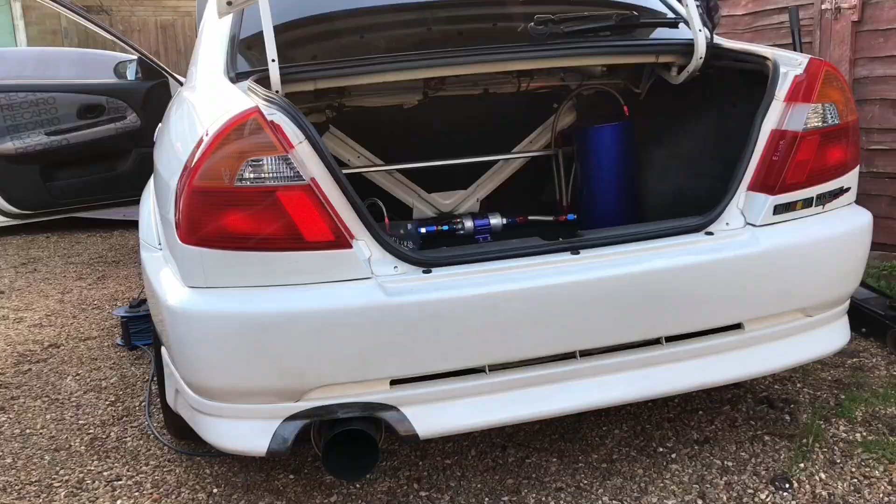So welcome back to another episode on the Mitsubishi Evo project. So you've seen that the engine was stripped down a few episodes ago and we were waiting for parts to come in. So obviously we've got the crankshaft in the box down here, which I'll pull out and show you for people who haven't seen it in the past.

And also we were waiting for rods to come from America, another set of I-beams that we wanted to fit into the car while it was apart, because I wasn't happy with the I-beams that came out of the car. They had a bit of damage to the bearing surfaces and I just was not happy with it. So ARP studs are in there still.

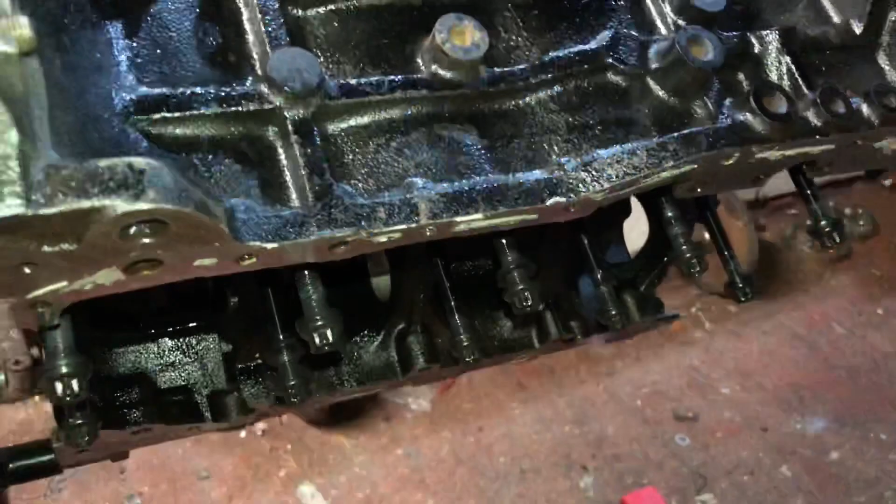We're going to get to installing this crankshaft now. I'm going to show you why the rods ain't getting fitted to this engine, and we're going to be replacing them completely. Obviously we've got CP pistons and I-beam rods to go in this, and head studs, etc. So we're just going to basically get to building this up. You saw it built up in the episodes last year, so there's no need to go through everything again.

So basically this is just going to be me building the engine and getting the short block finished, and then we've got the head, just going to clean up the head, and then we're about to bolt that on. So I hope you enjoy it.

So first off, all I'm going to do is get to cleaning up the block surface and any of the old gasket that's on it, just to make sure that the engine's sanitary clean. So it's got to be spotlessly clean, nothing inside, no grit, nothing. So blow out all the airlines, going to get brake cleaner in there, and I'm going to do all this first before starting to measure out the bearing clearances, etc. So that's what I'm going to get onto now.

I'm going to leave the studs in because they've all been taken out and I've ARP lubed them back up. So just going to get to thread tapping these holes, get rid of all this nasty sealant, and then we can get to building it back up.

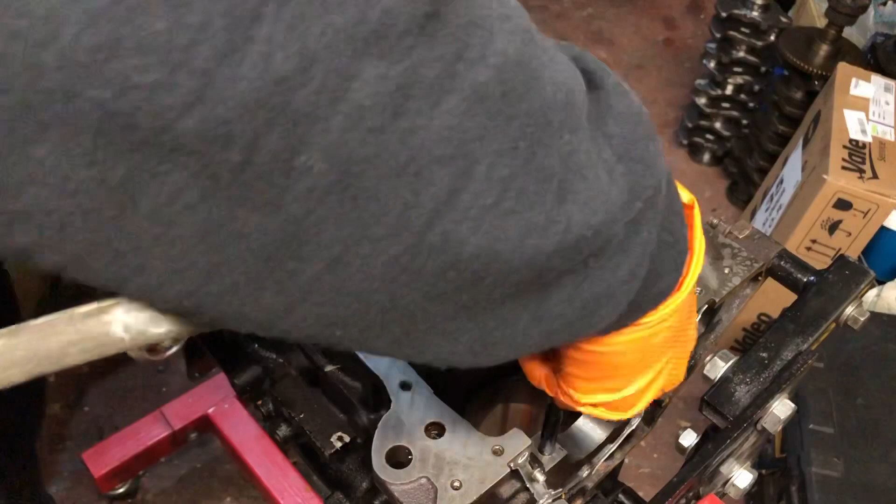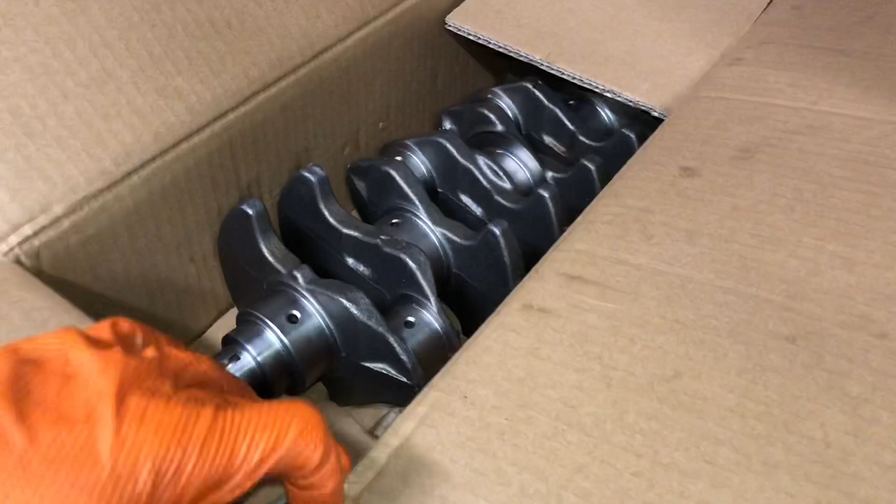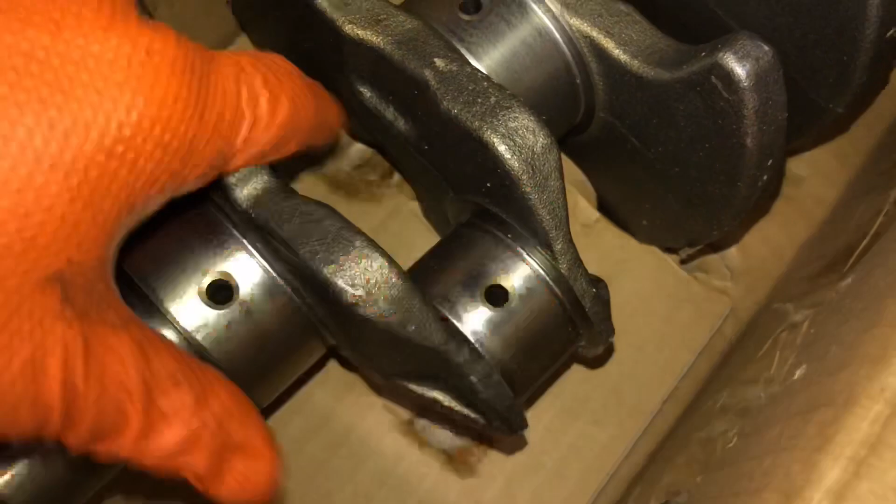So you've seen them before in the last video, but the parts that we've got for the car, this is the brand new 4G64 crank for the stroker kit. Obviously this is the part number for it for Mitsubishi, brand spanking new. So we're going to clean up the journals because they come with like a wax coating over the top of them, you can see here. So we've got to get some brake cleaner and get rid of that nasty stuff off of there so we can actually measure the bearing specs and tolerances.

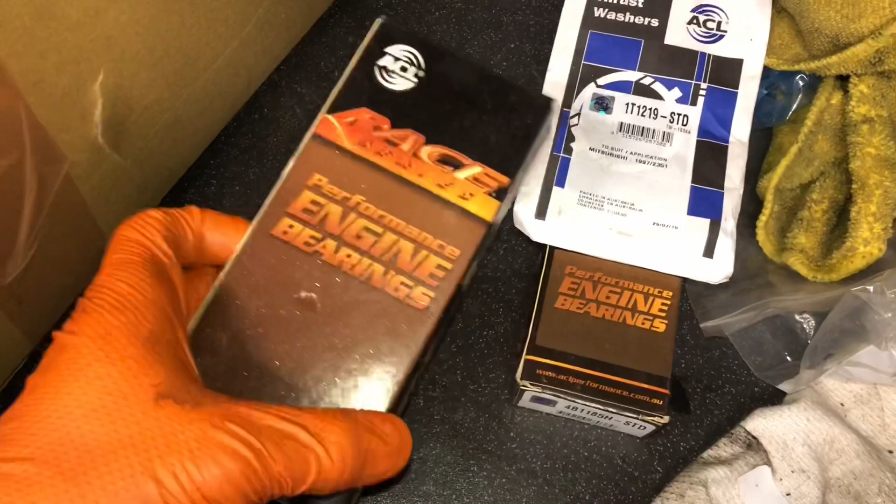Bearings we're going for ACL, obviously tried and trusted. I've used these a lot. King, Mahle, ACL, great bearings. So these are the mains. They're in standard size, and these are the rods, and obviously these are the thrust washers. So we're going to get to measuring out these bearing oil clearances.

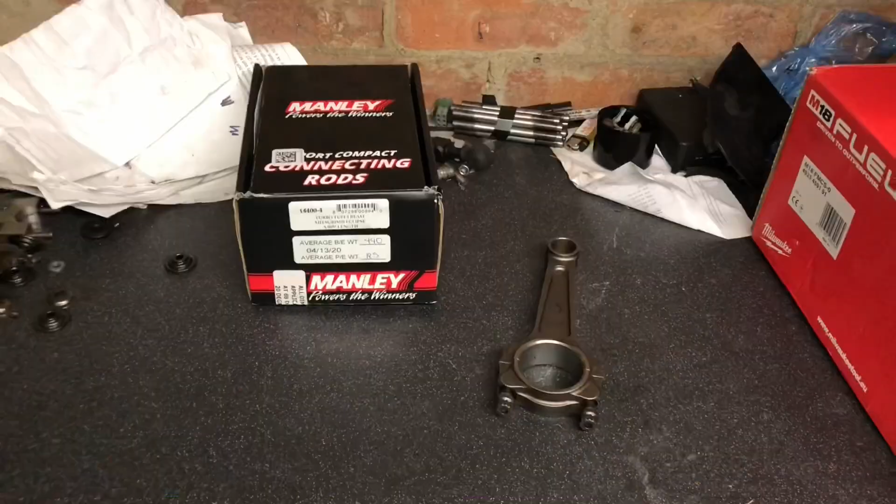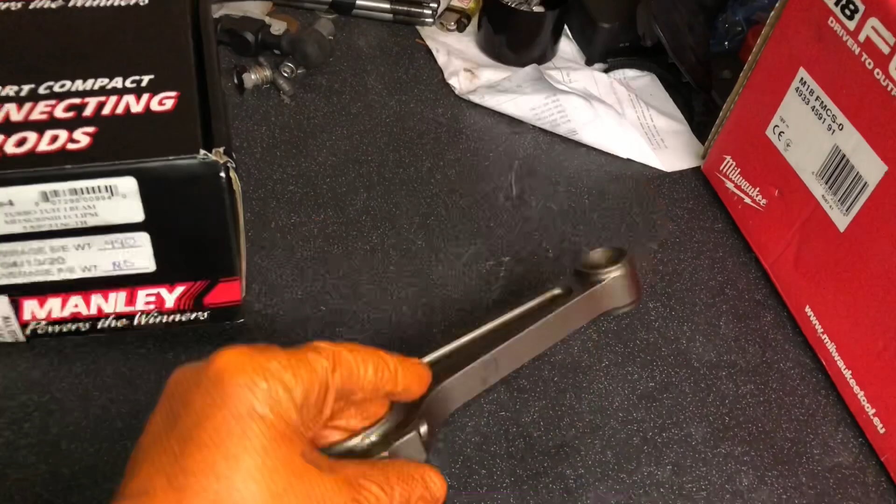Right, so now onto the connecting rods that we're going to be using with the car. Now obviously we had I-beams in there already. These are Turbo Tuff I-beams. Obviously they're a few years old now, and you can clearly see in here over time the bearings have spun in this engine, and they've been reused, and obviously the bolts have been reused. It was just a no-brainer to go with a new set of rods.

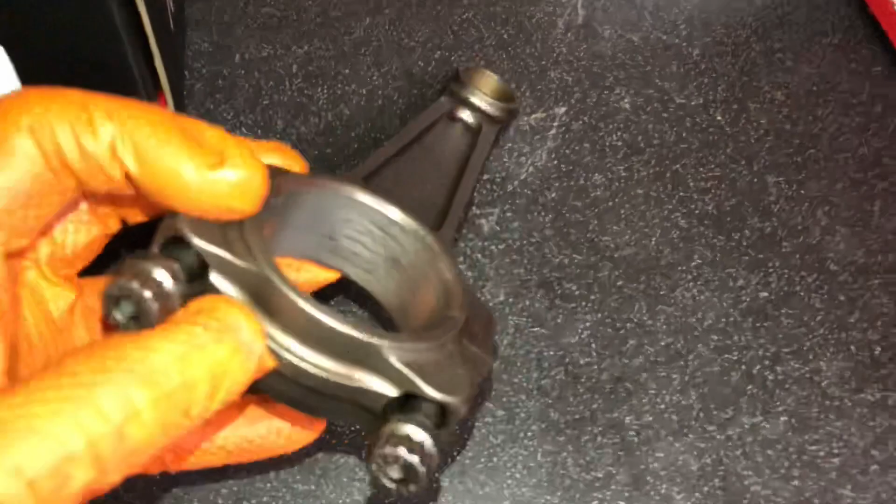Now you can see inside there clearly, try and focus in quickly, that there was a bit of damage that I wasn't happy with from the last bearing that spun, obviously down to the low oil pressure issue. The actual crank, which I'll show you in a second, was destroyed on the big end bearings, not so much on the mains, just on the big ends, and you can see in there it's damaged.

So what we've done is bit the bullet and went out and got another set of rods. So these are I-beam rods, exactly the same, but these are an updated version. So these are a lighter rod. So these are the same length, 5.905, and they're exactly the same for the stroker kit that we need. And we've also gone out and got matching bearings for them.

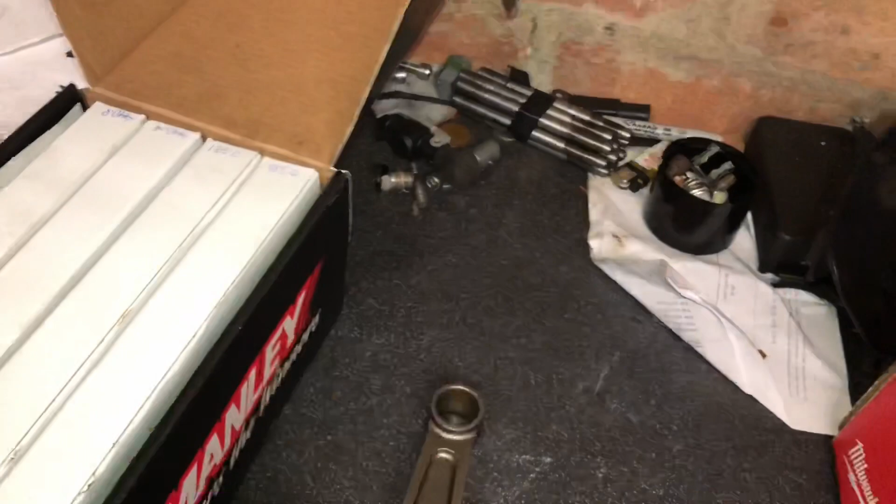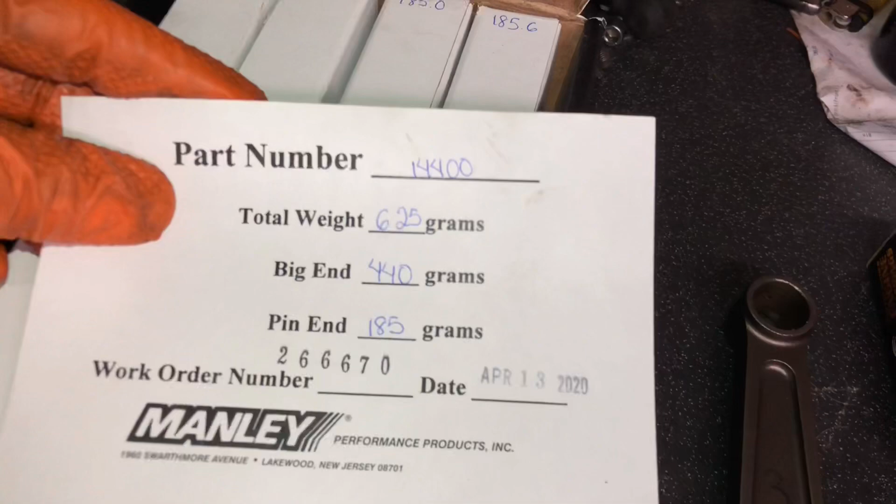So you can see here the recommended bearings for the ACL 4B1185H, and they're exactly the bearings that we got for the rod bearings as well. So you can see 4B1185H. So matching bearings, ACL race bearings for the matching rods. You can see all the rods have been weighed on each end, big end and the little end, and the weights are on there as well, 440 grams, total weight 625 grams. So everything's spec'd out exactly how we want them.

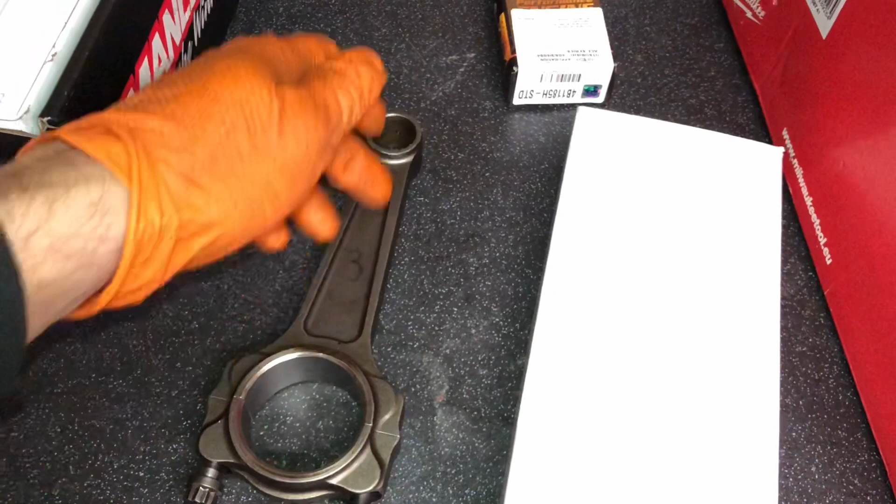So just going to unbox these now so you can see them side by side, because they're a slightly different rod compared to the older rod. This is the older style, and you'll see that there's some weight being saved on the big end, and it's a slightly different design up this end as well. The whole rod's been basically redesigned, and you can see in there obviously the bronze bushing that's been put in the little end. Just over time this starts to wear.

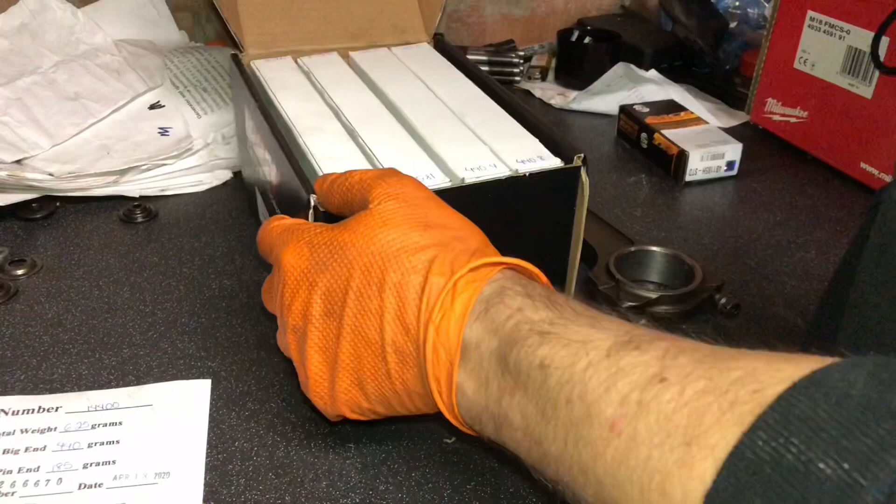There was no knocks from the little end or anything. These rods are actually good. But obviously down to the wear that's happened over the bearings spinning, it's a no-brainer just to replace them. So bit the bullet, these are the rods, let's unpackage them. Right, so let's get to unboxing these rods. So obviously you've just seen what rods we've gone for, and I'm just going to show you a comparison of them side by side now.

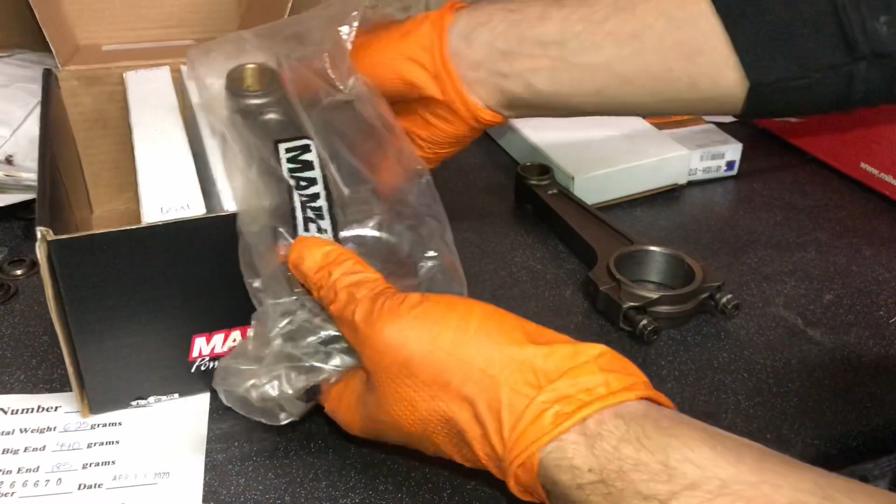So obviously we've got 4 brand new rods, that everything's been weighed out, so I can spec them with the pistons absolutely perfectly when I weigh the pistons. So you can see straight away they're a slightly different design to the ones out the old engine. So you can see there, the left-hand rods, they look a bit beefier actually. They do look a little bit beefier. But you can see here, on the side here, it looks like some material's been taken off. Obviously that's allowed for a little bit of weight.

I'm not really sure how many grams they are lighter, but they actually feel lighter. They definitely feel a lot lighter, which I'll weigh them obviously beforehand. Because I know these are 625 grams, but I'm not sure how much these ones weigh because they're an old design. And obviously now we're going to have fresh ARP bolts, because the bolts that have been in these rods, they've been torqued up a few times, and I've measured them and they haven't actually stretched, which is perfect. But, you know, go with extra precautions with these sort of power levels.

These are 1,000 horsepower rated rods. Obviously, we're not going to be going to 1,000 horsepower. They're exactly the same length, obviously made for the stroker kit. So we're running obviously the 4G64 crank, which is a 2.4 crank. You can see here, obviously got the fresh bronze bearings inside the little end. And yeah, these are going to absolutely smash the target that we want. We want 700 horsepower on race fuel, which should be easily doable.

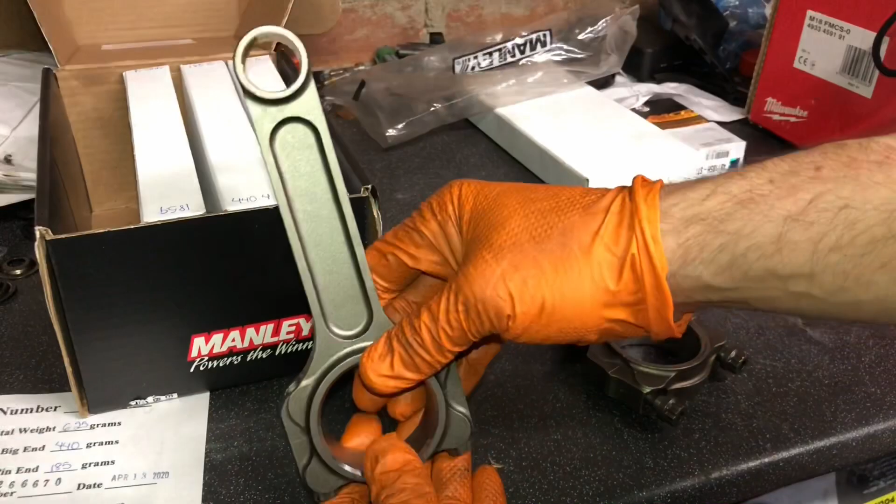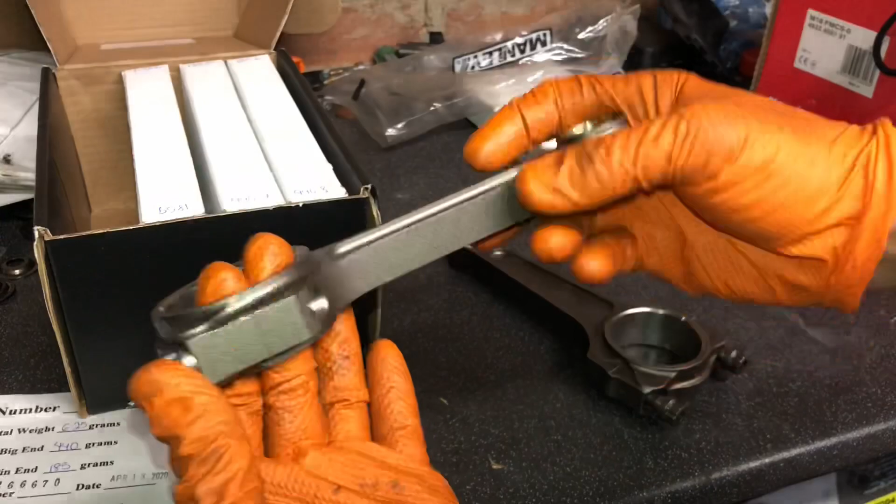We could have went out and bought H-beam rods, which would have done like 650, but there's no point because you're going to be pushing them right to the limits, and you've got the problem with they could snap, they could bend, and you don't want that. So gone out and got the I-beam rods, a little bit more expensive, but you can see they're a work of art. They are really engineered beautifully, really light rods for the size of them, and I couldn't be happier really.

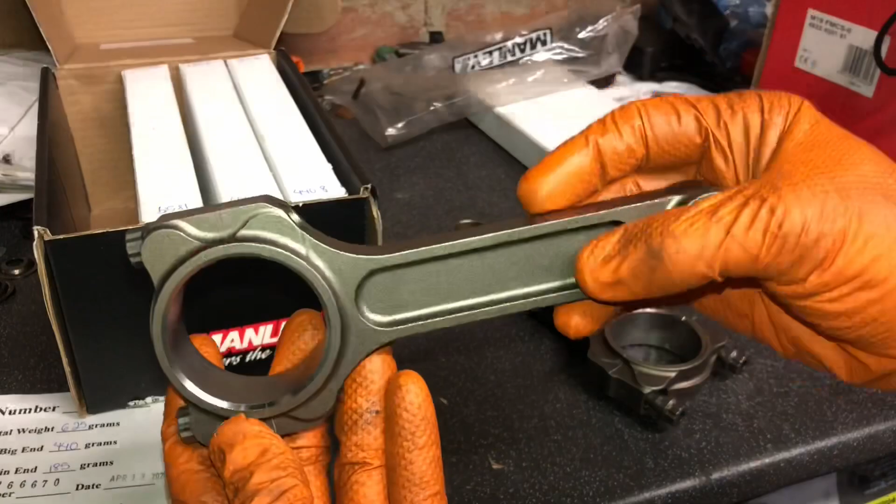So we're going to get the measuring of them now, put the dial bore gauge inside, measure the bearings, etc. Get the oil clearances absolutely perfect to how I want them, and then I'll be able to choose what sort of oil grade I want to use with the spec of bearing clearances that I'm using. So enjoy that. Right, so Manley have kindly included a data sheet that they put in with these connecting rods.

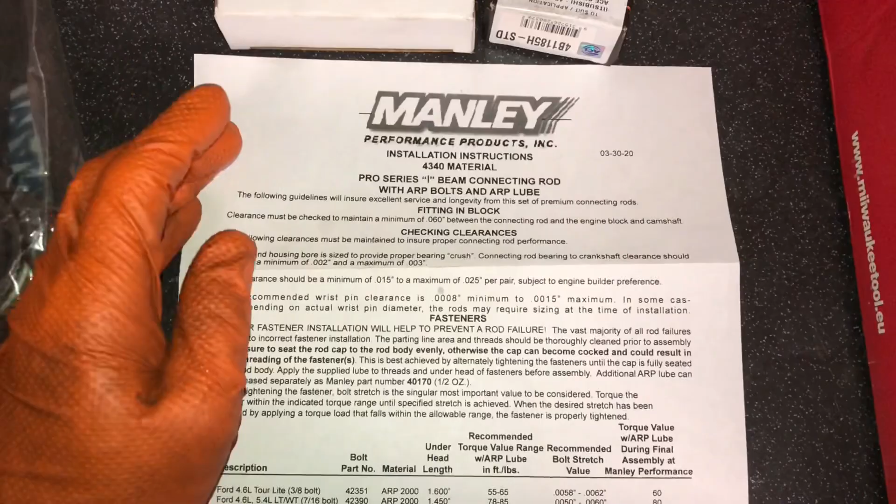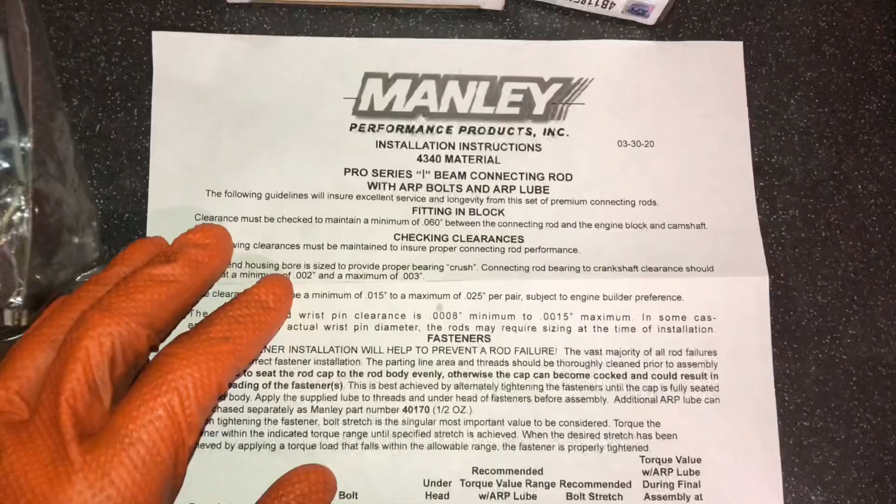Now you can see here, obviously the Pro series I-beam connecting rods. Now, in my opinion, they're one of the best rods that you can get for these engines, 4G63, 4G64. There's probably no better rod out there. I know you've obviously got the Carrillo and Arrow rods, and there's a ton out there, and people have got their own opinions. But I love these rods, and they're super strong. I'm yet to see any of them break or bend or whatever.

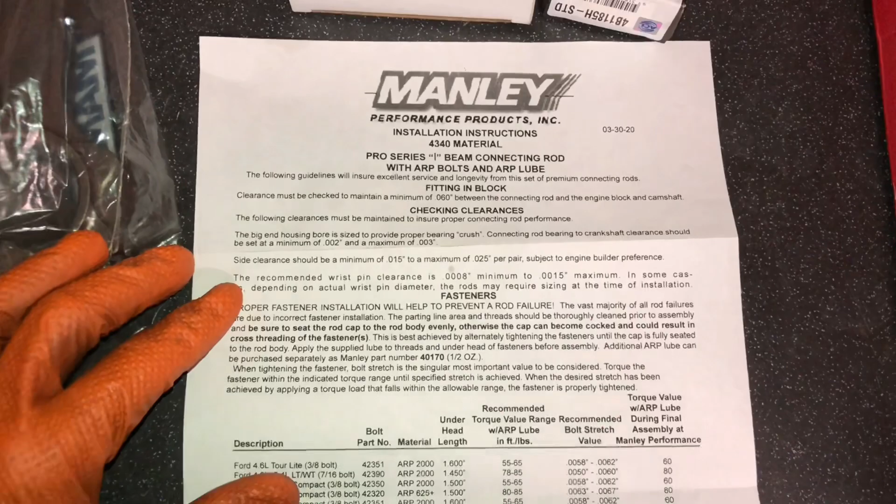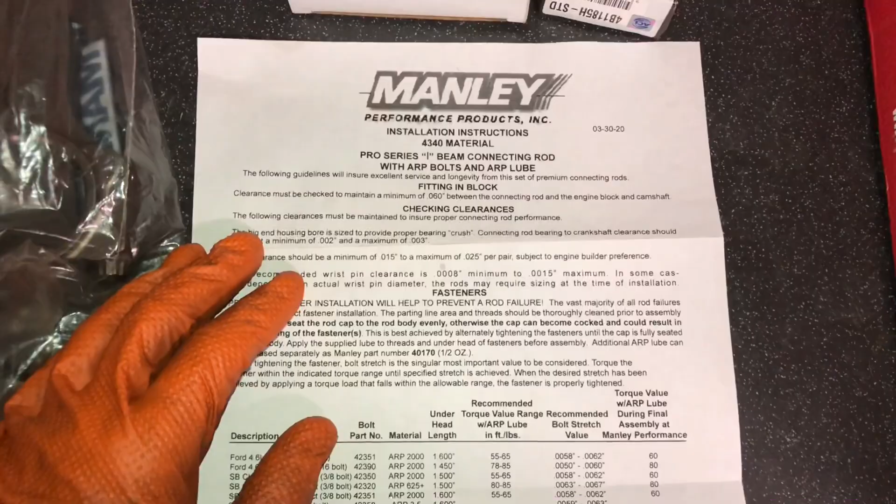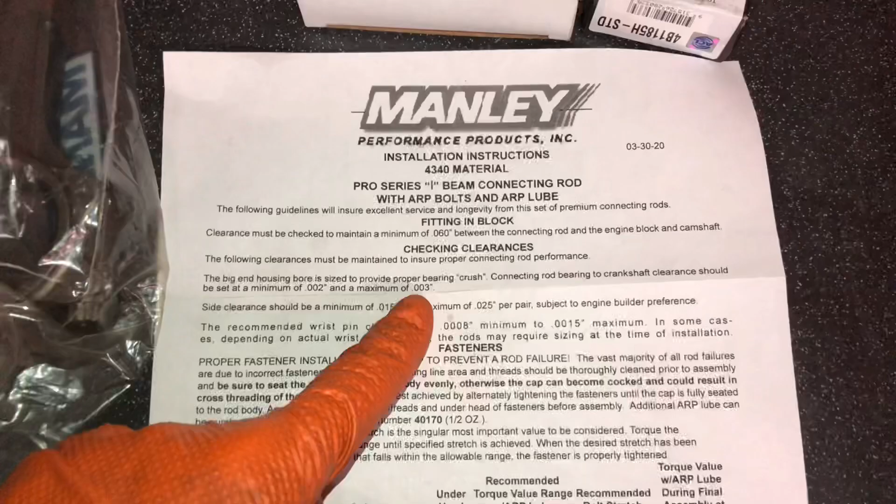And 1,000 horsepower rated. I mean, you're not going to do any more than that on a genuine dyno. I know Americans love to do wheel horsepower. They convert it into fly horsepower and all sorts of weird stuff. But genuine power, you're going to have to go to a billet block at any sort of power level after that. But you can see here they give you a rough guide of what oil clearances they want for the rods. 2 to 3 thou, which is quite large actually. You want some sort of thick weight oil to be running that sort of gap.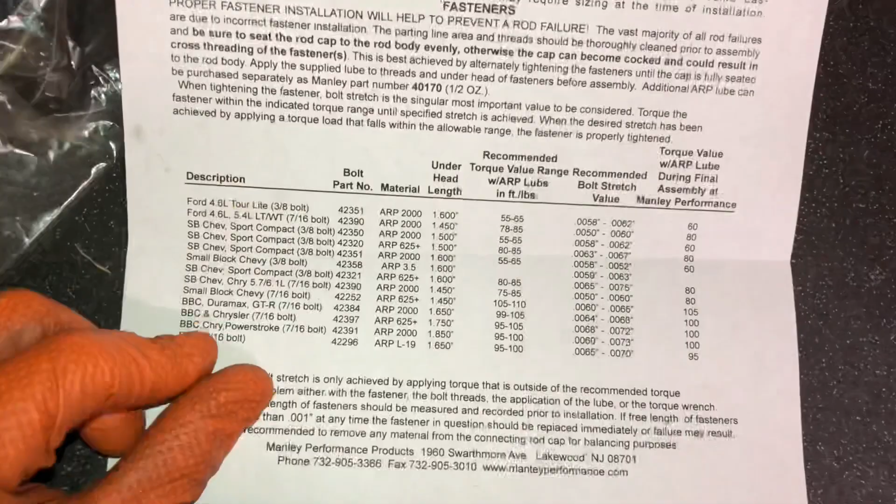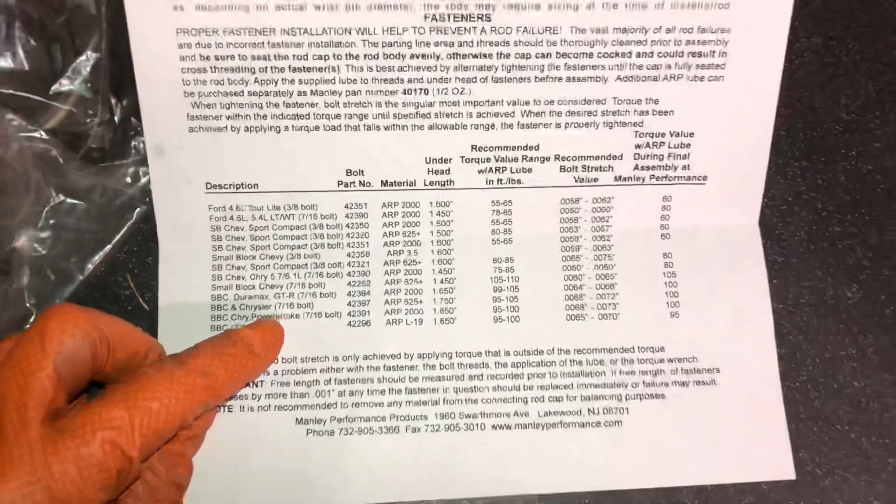And yeah, so they've literally got all the torque specs, everything here. There's nothing actually listed for them, but all I'll do is match up the length of the bolt and the head of the bolt, etc. Because you can see it's for the American market with the V8s, etc. So yeah, I'm going to just measure these up now, start getting the clearances together so we can bolt these together.

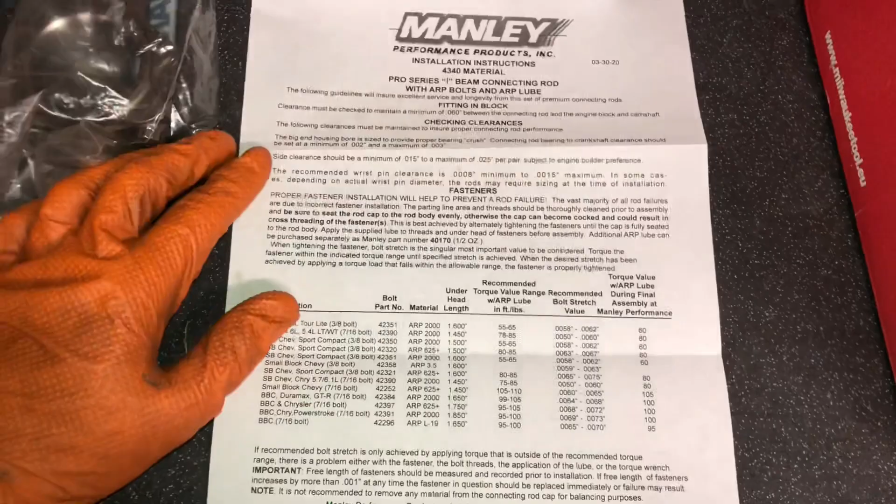I'm not going to show you all that. I showed you all that in the previous videos, I think it was last year. So you're just going to see me basically bolting this together. But just be assured, all the clearances have been spec'd out with a micrometer, with a dial bore gauge, etc. And all the bearing oil clearances are perfect. So then I'll be able to pick an oil that I want to use for this engine, different weights of oil for different clearances, etc. So I'm going to get onto that now.

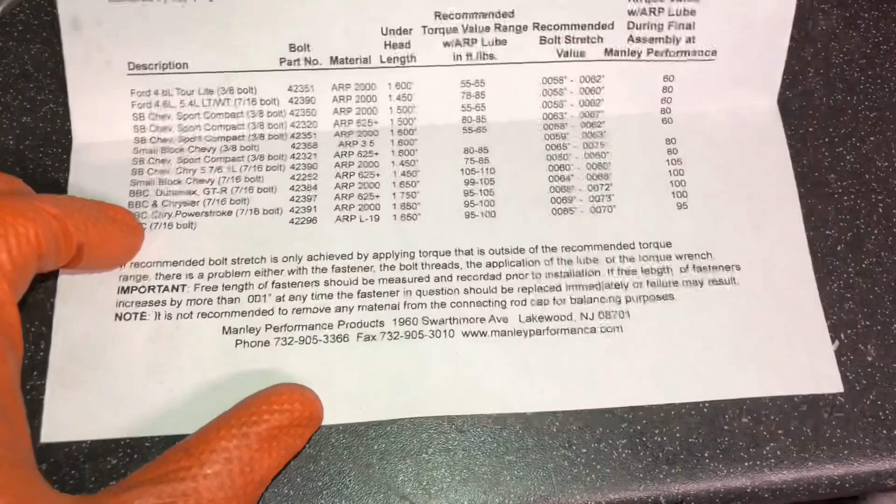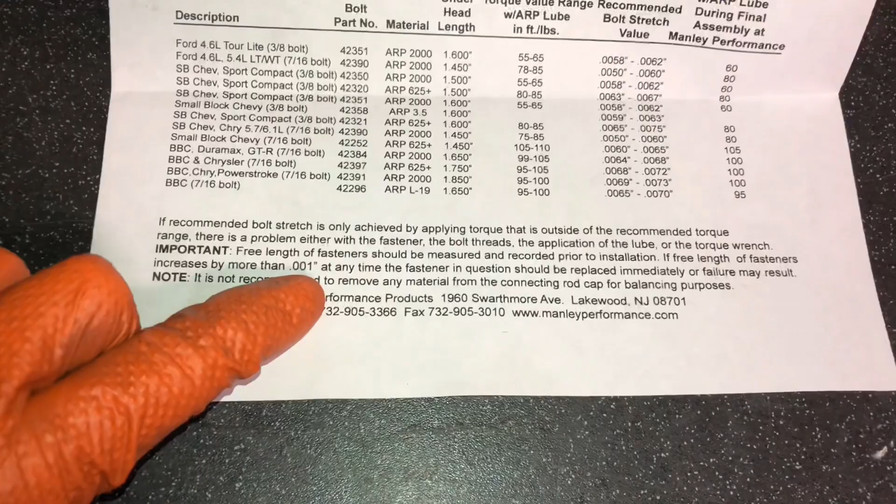Just an important reference point, it's nicely put here actually, which is going to help me explain it to you a bit more. So with the bolts, always measure them when they're brand new with a micrometer, to show the length of the bolt before you even attempt to torque them up. They're allowing for 1 thou stretch on these bolts, and that's the same with the mains and the head bolts as well. And past that 1 thou, it's past its critical point of stretch and it will break. So always measure them before, then torque them up, and you can pull them back apart and measure for stretch, and that's how you're going to know.

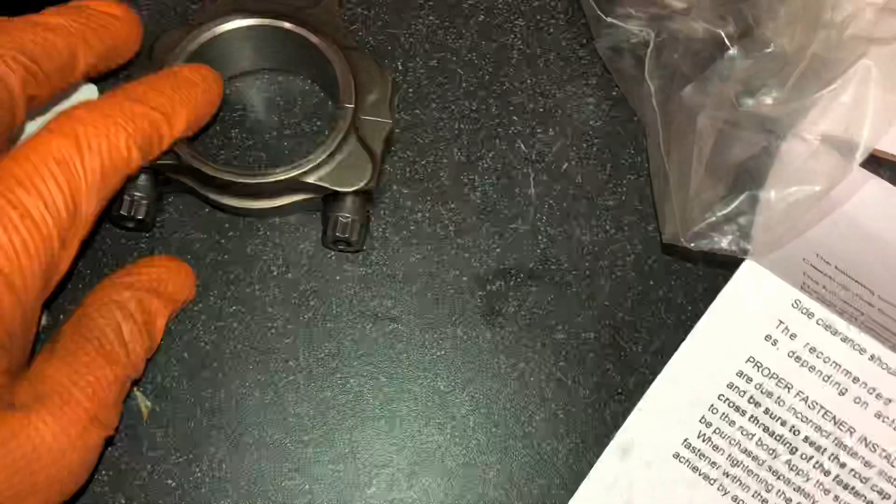Now I've measured the ones that came out of the old rods, which are here, and they're absolutely fine. They haven't stretched at all. They're exactly the same as the brand new bolts, which is absolutely perfect. So we've got no stretch with those torque levels. So it's very important if you're building them yourself. If you're first starting off, stretch of a bolt is so important. That's the main failure of these rods.

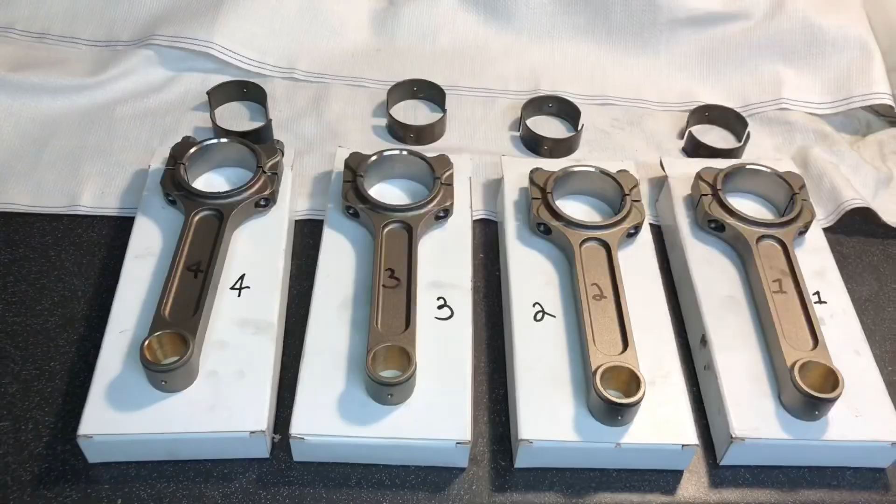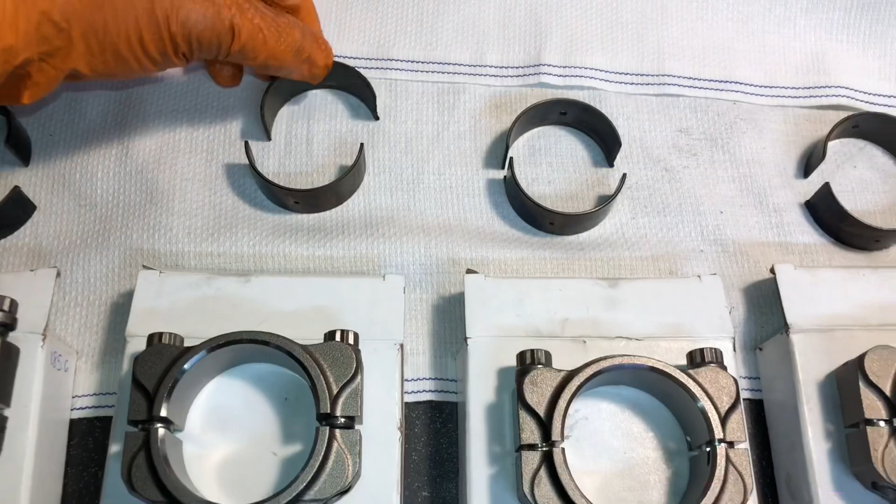Well, after a ton of measurements, I've come up with the oil clearances exactly that I want across all 4 rods, which is a little bit of work because I've had to move the shells around a ton of times. But I finally got there, so we labelled 1 to 4, and I don't want to mix them up, so all the rods are labelled, the boxes are labelled, so I know the weights of the rods, and all the bearing shells are behind them, exactly in the order that I need to fit them, to give me the oil clearances that I want.

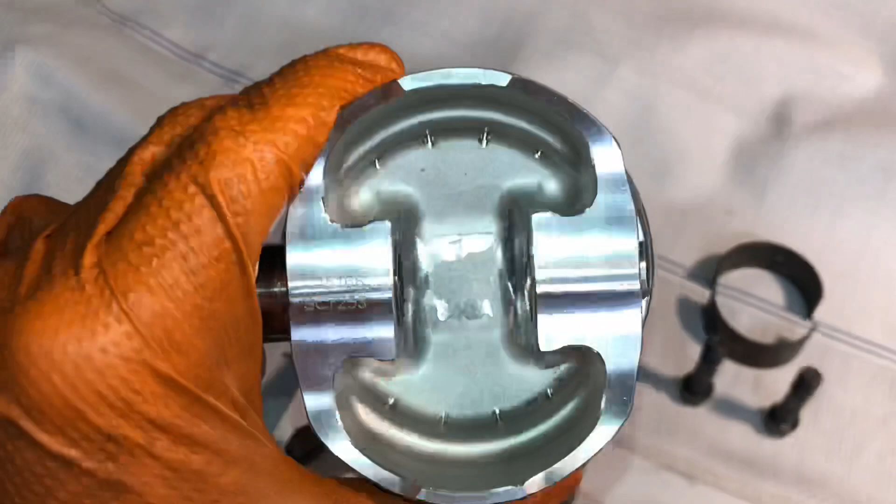So I'm just about to start attaching the pistons to the rods. Now the pistons that we're using are the same CP pistons we used before, and I machined them out to make them matching and balanced, so you can just about see the CP sign in there, and there's the part code for it. So these are amazing pistons, very strong. They're going to go well with these rods, so about to get these onto the rods now.

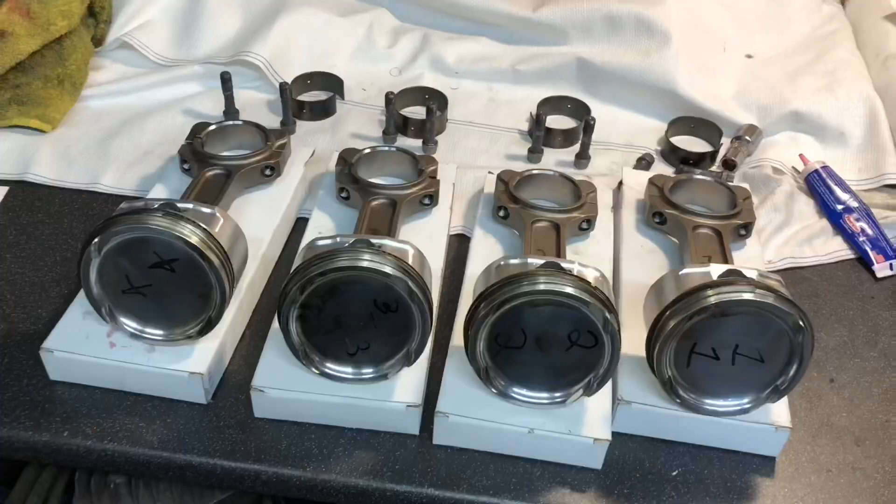So there we go, the pistons are all mounted onto the brand new rods. We're ready to get these pistons in. Obviously got to get the bearings in first, and then we can just put these into the bores, slide them in. Obviously the rings have all been gapped previously, they don't need to be done. You ain't got to take none of that off, just got to clock them into their position. You can see pistons all nice and clean, brand new rods. It's going to be a nice strong build.